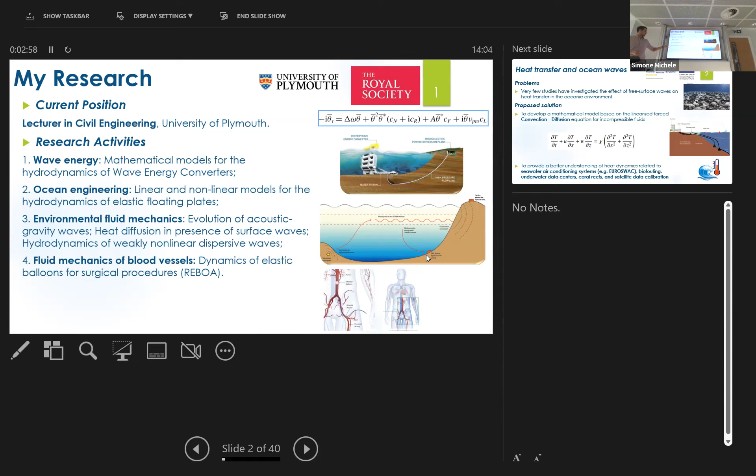More recently, I started working on this problem: heat transfer related with ocean waves. There are really very few studies that focus on the effects of free surface waves on heat transfer in the oceanic environment.

My idea, in order to study this effect from free surface waves, is to develop a model based on this equation here, which is the convection-diffusion equation or transport diffusion equation. This is linearized, so there are no nonlinear terms here. It looks simple, but if U and W, the velocity components, are complicated, the solution can be challenging.

In this case, T is the temperature, small t is time, X and Z are the coordinates. This chi here is the thermometric conductivity, and U and W are respectively the horizontal and vertical velocity components.

Now, the application of this theory can be broad. The aim is to provide a better understanding of heat dynamics related to seawater air conditioning systems. I'm involved in this EuroSWAC project, which is an Interreg project. Here you can see a sketch: basically, there is an intake pipe and outtake pipe to use seawater as a refrigerant to air cooling.

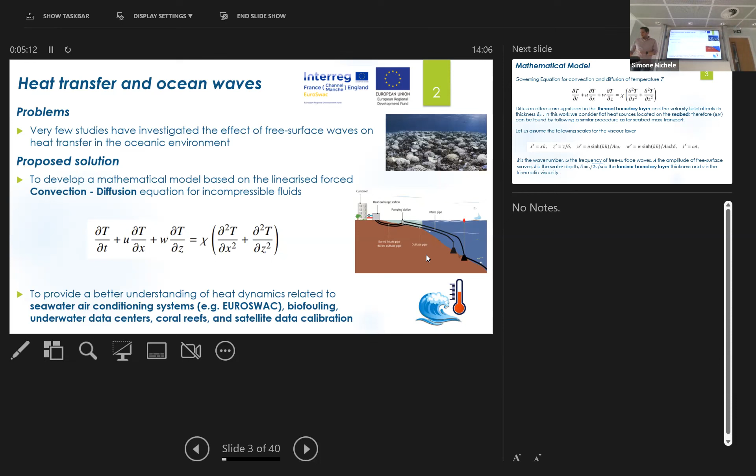So again, this is the governing equation for the temperature T. I'm considering laminar flow, and I consider also flat heat sources located at the seabed for simplicity. That means large gradients of temperature occur in this viscous and thermal boundary layer, which means the velocity field must depend on fluid viscosity.

In water wave theory applied to the viscous boundary layer, we usually assume the following scales. K is the wave number, so it's 2 pi divided by the wavelength. This delta here is the thickness of the boundary layer, defined as the square root of 2 nu divided by omega, where nu is the kinematic viscosity and omega is the frequency of the free surface waves.

A is the amplitude of the free surface waves, and this is the scale for time. Here you can also see the scale for the horizontal and vertical oscillations in the region close to the seabed. These are quite popular scales in the field of viscous boundary layers in the ocean.

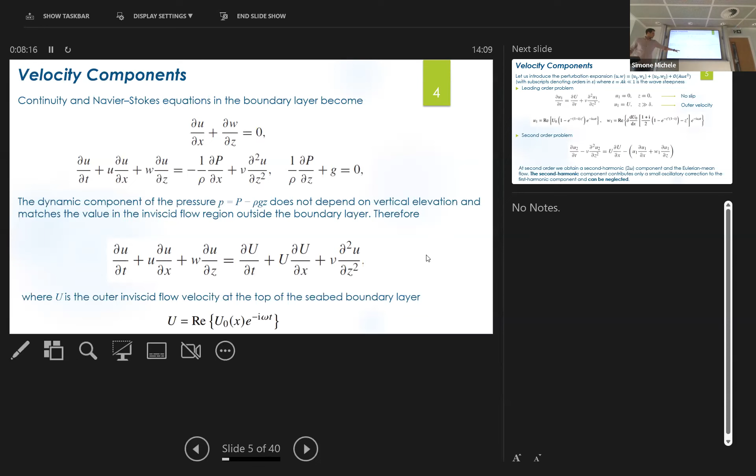And apply a perturbation expansion. This is a standard procedure used to analyze seabed mass transfer phenomena in the ocean. U1 are the leading order velocity components, U2 are the second order components, so here we are developing a second order theory. Epsilon represents the wave steepness.

In this theory, we could— did you assume shallow water? No, we are in the case of intermediate waters, so it's general. We are just assuming that AK is much smaller than 1.

So the wave steepness is smaller than 1. Yeah, the water depth is not in this problem, is it? No, it's general. It was the beginning with KH, right? No, we are not shallow water, it's completely general. These are the scales that we usually have even in intermediate water depths. AW is basically the velocity scale for the water particle velocity on the free surface.

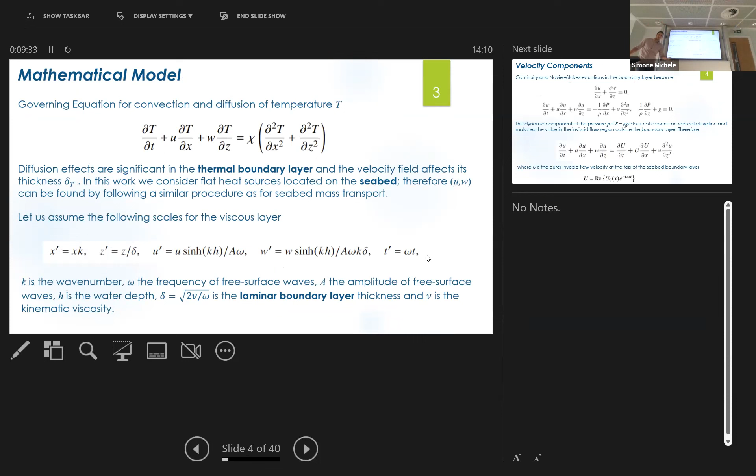The presence of the hyperbolic sine is the effect of water depth, but we are in intermediate waters. It has to be intermediate, right? Otherwise, exactly—if it's deep water, then you don't have any effect.

So we apply this perturbation approach, and we have this first equation here, which is a kind of heat diffusion equation forced by this term, which is the effect of free surface waves at the seabed. Now we apply these two boundary conditions.

We have the velocity equal to 0, so the no-slip condition at the seabed. And we also assume that the velocity in the viscous boundary layer matches the outer velocity, the velocity related to the free surface waves.

This expression can be easily solved, and here you can see the two solutions. Once we get U1 first, the horizontal component, W can be found by applying the continuity equation. And these velocity components

are related to a synchronous response, so they have the same frequency as the incident waves.

Now we can move to second order. This is the first order solution of the velocity field in the viscous boundary layer. For the second order problem, we need to solve this expression here. Now we need to find U2.

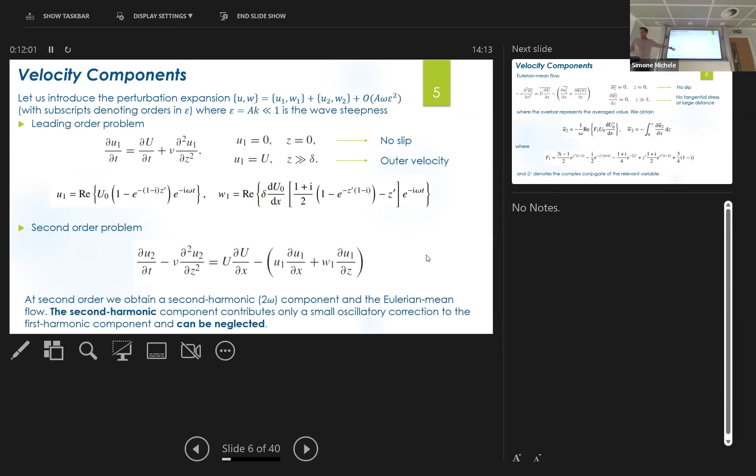We can average this expression and get this differential equation. The boundary conditions that we apply are shown here: we have again the no-slip condition at the seabed, at z equal to 0, and we apply the no tangential stress at very large distances.

We can solve this expression; we just need to integrate with respect to z, and we get the expression for U2, the horizontal component, and the vertical component of the Eulerian mean current. As you can see, that depends on these variables, U0 and the derivative of U0 with respect to x.

Inside these expressions, you can see F1. This function is shown here; it's quite complex, but it represents a combination of oscillation and hyperbolic functions. The asterisk denotes the complex conjugate of the relevant variable.

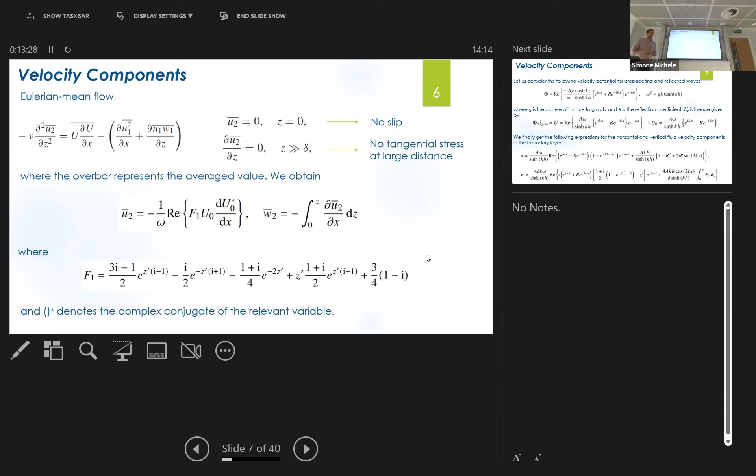Now, basically here, we need to just substitute a suitable expression for the velocity potential. We need to assign this irrotational velocity component. For example, since we are considering a two-dimensional geometry and a flat seabed, we can consider the following velocity potential for free surface waves.

This is the velocity potential for propagating and reflected waves. When r is equal to 0, we have just propagating waves. When r is equal to 1, we have the effects of reflected waves. This is basically the dynamics in front of a breakwater, where we have standing waves.

And k, which is the wave number, can be found by solving this dispersion relation, which relates frequency and wavelength. This is valid in intermediate waters, for any value of k.

Now, we are assigning this velocity potential, so we can now find U0, the velocity in the irrotational domain. This is given here, because the horizontal velocity is simply the derivative with respect to x of the velocity potential.

So the expression for U0 is given here. Now we can substitute this U0 inside the previous expressions for U1 and U2, W1 and W2, and we get these very long expressions for the velocity components. Basically, these velocity components represent the velocity components in the viscous boundary layer at the seabed.

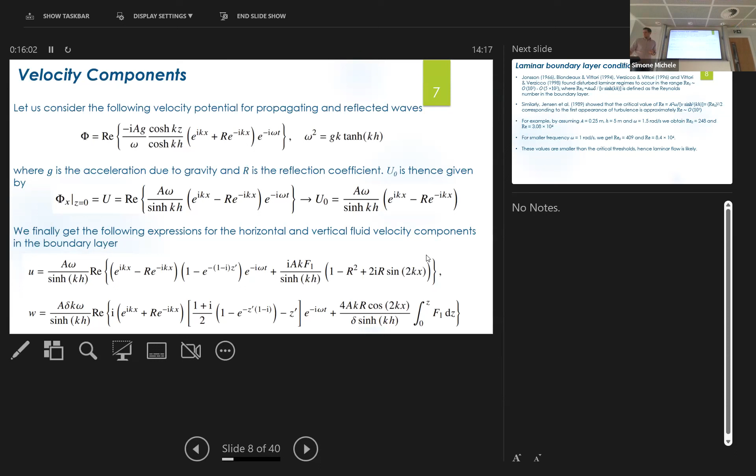Now, some authors analyze the stability of laminar flows at the seabed. For example, Jonsson, Blondeau, Vittori, and Verzicco found that there could be some disturbed laminar regimes in this range of value of RE delta, where RE delta is the Reynolds number in the boundary layer. So when this RE delta is between 100 and 500, we can have some perturbation of the laminar flow.

Similarly, Jensen defined a different Reynolds number, related with RE delta, and found that when RE is equal to 10 to the 6, we can have turbulence.

In other words, if you consider free surface waves having amplitude of about 0.25 meters, propagating over sea depth of 5 meters, and having frequency of 1.5 radians per second, which is a common situation in the ocean, in this case RE delta is 248, and RE is 3 times 10 to the 4. So, for example, in this case, laminar flow is likely to occur.

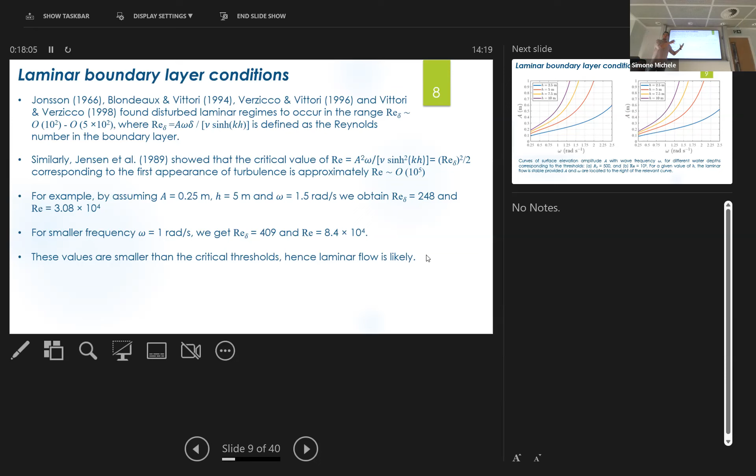In this figure, I show the two criteria: this is the criteria derived by Jonsson, Blondeaux, Verzicco, and others, and this is the criteria derived by Jensen. Here I have the free surface elevation amplitude, A, versus wave frequency for different water depths, corresponding to the different thresholds.

Now, for a given value of water depth H, the laminar flow is stable, provided A and omega are located to the right of the relevant curve. What does it mean? For example, if I consider water depth about 5 meters and wave frequency of 1 radian per second, I have a stable laminar flow only if the wave amplitude is less than 0.28 meters. In other words, I need to pick some values of A and omega located on the right-hand side of the relevant curve.

Above this curve, we can have turbulence.

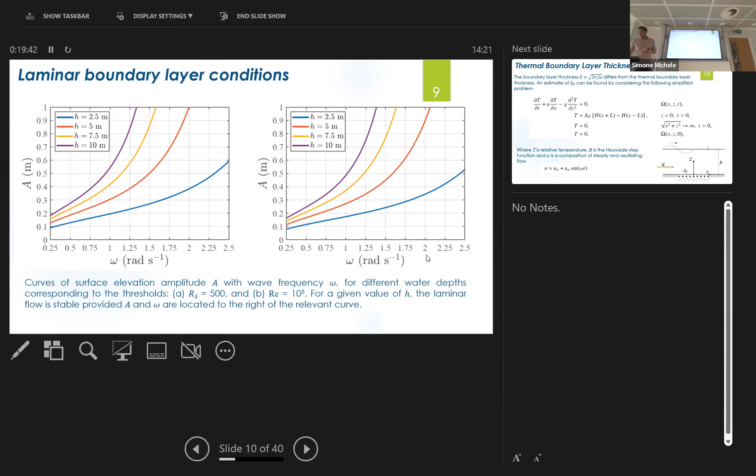Now, we need still to simplify the problem. We need to estimate the boundary layer thickness, the thermal boundary layer thickness. That's because the viscous boundary layer thickness, defined here, the scale for the boundary layer thickness, differs from the thermal boundary layer thickness. It's different. One deals with viscosity, the other deals with temperature.

Now, an estimate of delta T, the thickness for the thermal boundary layer, can be found in this way. For example, we can consider this simplified problem here.

We still have a convection diffusion temperature equation in absence of a vertical velocity component. So we are just considering horizontal flows, trying to simulate the effects of simple propagating waves. U, the velocity here, can be written in this form as a composition of steady and oscillating components, like if we have an Eulerian mean component and an oscillating component.

The diffusion term related with the horizontal diffusion can be neglected, because it's much smaller than this one. It can be shown later, so I'm just reporting the dominant terms here.

At the seabed, I can consider this heat source here. Delta T is the temperature of the heat source, located between x equal to minus L and L. H is the Heaviside step function. Here the temperature is 0, and the temperature is also 0 at very large distances from the heat source.

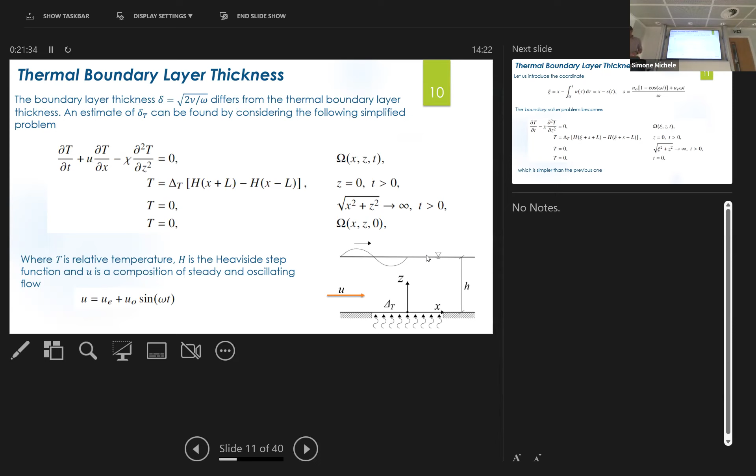If I consider this problem, it can be solved by using the following coordinate. I can integrate the velocity to get this new variable S. If I substitute this quantity in the previous problem, I can simplify the equation.

So I don't have the convective term anymore, but I have a more complicated term at the seabed. Anyway, the problem is much simpler. I can solve it by applying the sine Fourier transform, because I have a Dirichlet boundary condition at the seabed.

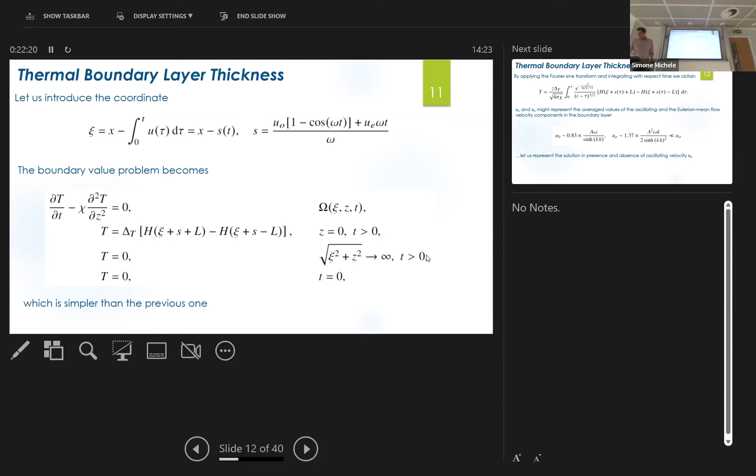Then I can integrate with respect to time. So the solution of this problem is written here. It has been derived by Pedley, I think 50 years ago. This is the solution expressed in integral form for the temperature.

Now U0 and UE, my two velocity components, the steady component and the oscillating component, can also be written in this way. This represents the solution in the absence of oscillating velocity.

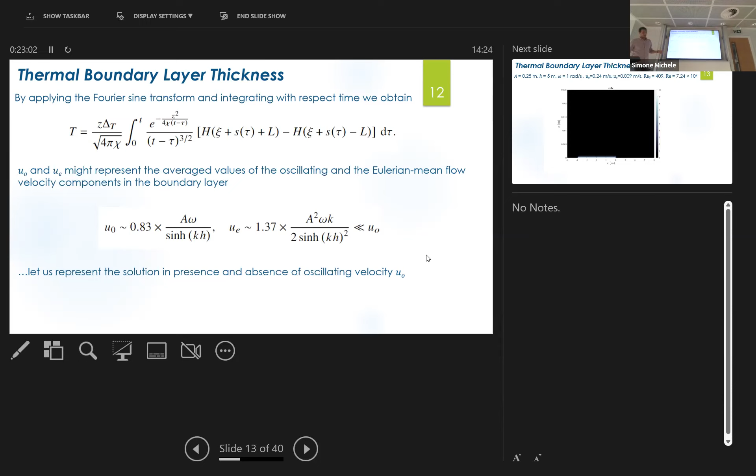Now if I assume these quantities, I can try to represent the propagation of temperature. I consider these parameters: free surface wave amplitude about 0.25 meters, water depth about 5 meters, frequency of 1 radian per second. These are the corresponding velocities.

This is the velocity at the leading order, and this is the velocity of the Eulerian mean flow. As you can see, the Eulerian mean flow component is much smaller than the leading order velocity, but as I will show you later, this is the main actor influencing temperature diffusion. I also have these two Reynolds numbers, and I assume that the laminar flow is stable.

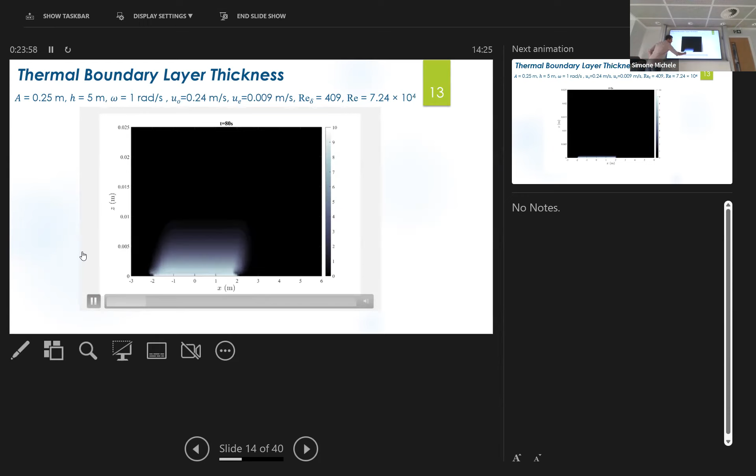So I have this heat source here from -2 to 2 meters. I have the oscillating component and the Eulerian streaming, the Eulerian mean flow, directed rightwards. As you can see, there are fast oscillations, but the temperature field bends towards the right. Here the heat source has a temperature of 10 degrees.

Now, for simplicity, I neglect the effect of the fast oscillations. So what's going to happen? The temperature tends to propagate upwards and then bends towards the right. Here you can see time, 300 seconds, then up to 500.

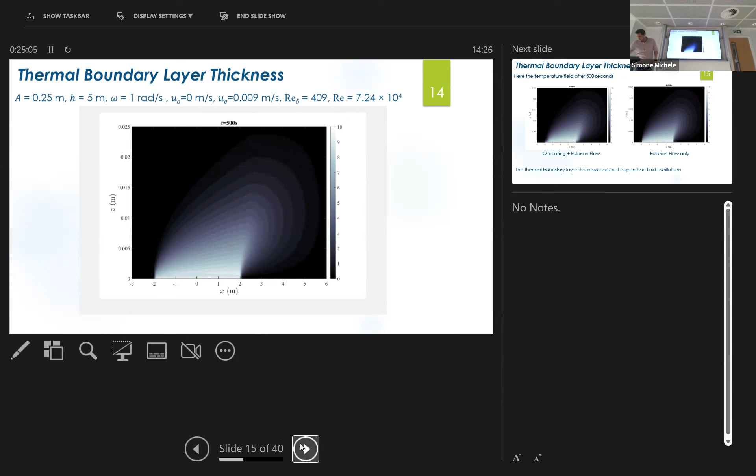Now I compare this picture with the previous one when time equals 500 seconds. As you can see, the thermal boundary layer thickness is not affected by fast fluid oscillations - this thickness here is basically the same as we have here. So that means to estimate the boundary layer thickness, we can simply consider the Eulerian mean flow directed horizontally, for these scales of the heat source, if the heat source is not very, very small.

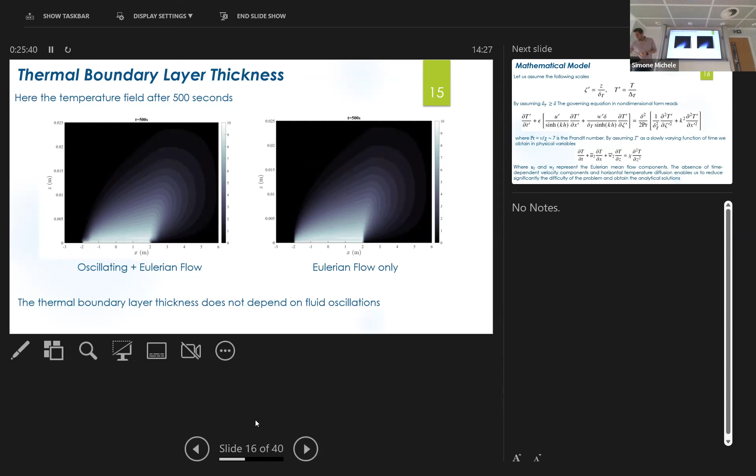Now we can try to simplify the problem for the temperature. We go back to the equation for temperature and assume these two following scales. Delta T is the thickness of the thermal boundary layer - not the viscous boundary layer - and this big Delta T is the relative temperature of the heat source.

I just would like to point out that this theory is valid for very small variation of temperature. Otherwise, viscosity, density, and specific heat would depend on temperature. So in this case, kinematic viscosity, density, and specific heat are constant.

Now I can substitute these quantities into the temperature equation, and I can get the temperature equation expressed in non-dimensional form, which is specified here. Now, the second and third terms on the right-hand side are much smaller than the first.

So that means that the temperature for these scales, for these two scales and the scales that I introduced at the beginning, the temperature does not depend on the fast time oscillations, because this term would be equal to 0. So that means that we can assume T, the temperature, as a slowly varying function of time.

Depends slowly on time. So if I assume this, I can integrate, I can average the equation with respect to the fast time, and I can get this equation here for the temperature.

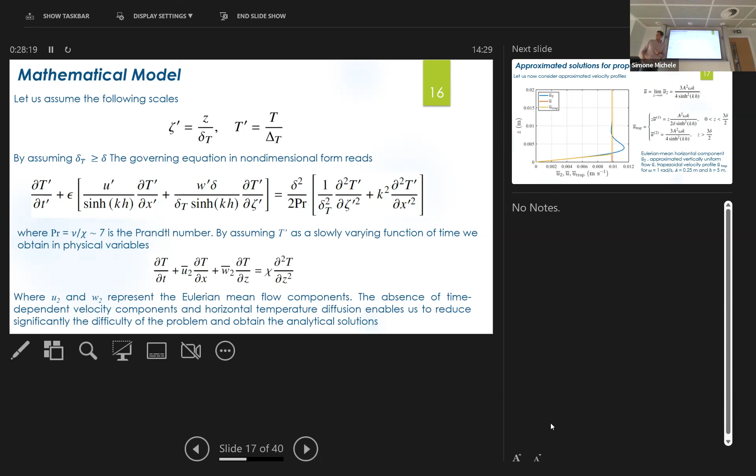Now, let's consider just propagating waves, so the case in which R, the reflection coefficient, is equal to 0.

The blue curve shown here is the Eulerian mean horizontal component, which, as you can see, looks quite complicated. It grows linearly, then it starts to oscillate and reach a constant value.

Well, an analytical solution in presence of this velocity component is quite difficult, so let's try to understand what's going to happen if I consider an approximated velocity. For example, I can consider a constant velocity, which is represented by this red line.

So basically a uniform flow, constant velocity. And then I can consider the trapezoidal approximation, the yellow curve here, in which the velocity increases linearly, and then it reaches a constant value when z is equal to 3 delta divided by 2, where delta is the viscous boundary layer thickness. Here you can see the expression for the trapezoidal velocity component and the expression for the uniform flow.

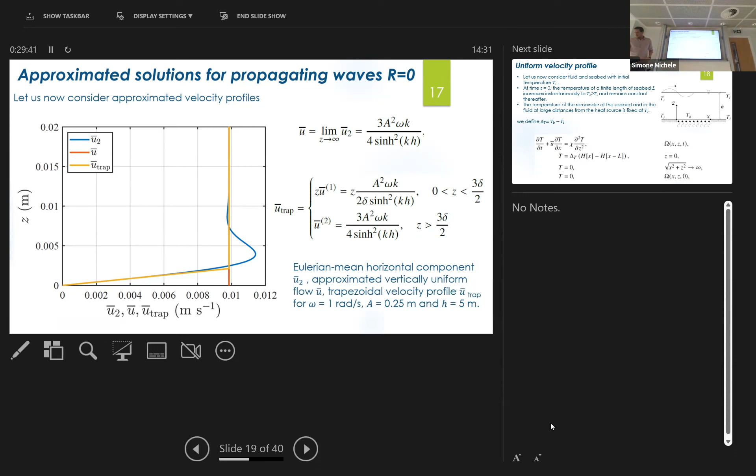Let's study the uniform velocity profile, which is basically similar to the problem that I already showed you, except for the fact that there is no time dependence in the velocity component here. So the solution can be found in the same way.

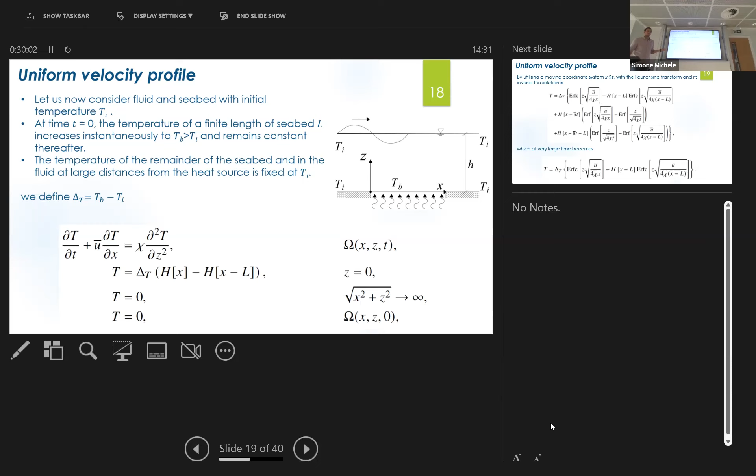And now the integral can be solved explicitly, and the solution is given here. So temperature is a composition of these 4 terms.

The first term here is the steady state solution, it does not depend on time. The second and third terms, on the second and third row, represent the time dependence above and outside the heat source.

When time increases, at very, very large time, this term, the Heaviside function, becomes equal to 0, so this term does not exist anymore. And the solution at very large time, the steady state solution, is given here, in which Erfc is the complementary error function.

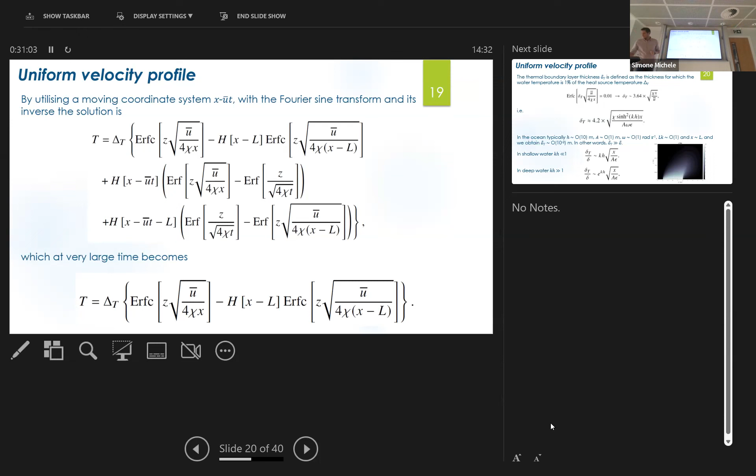Let's try to estimate the thickness for the thermal boundary layer by using this expression here. If I consider just the thermal boundary layer above the heat source, I can define the boundary layer thickness as the thickness for which the temperature is 1% of the heat source temperature delta T.

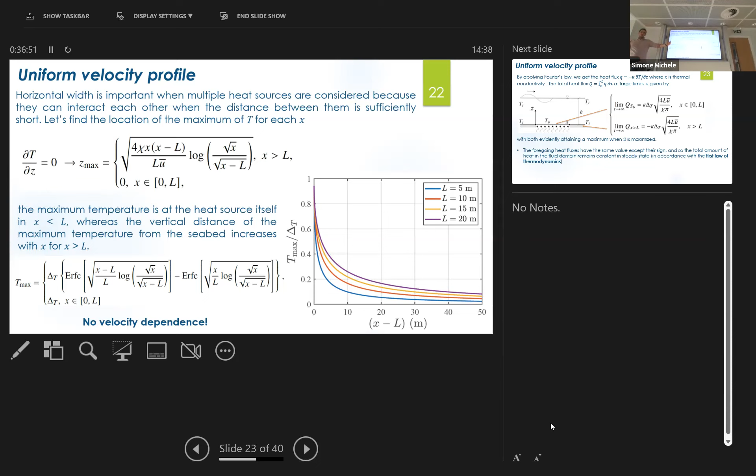But it's interesting to note that this value does not depend on the fluid velocity. I would say the velocity should increase the width of this thermal boundary layer, but apparently this is not the case. So the velocity only affects the vertical dimension of the thermal boundary layer thickness, while the horizontal width depends just on the length of the heat source.

This is also shown here. This is basically the horizontal dimension, approximately, which is the same dimension that we have here. But the vertical width is different. Maybe it's difficult to see here, but the vertical dimension is different, while the horizontal width is the same.

We derived the temperature. Now we can derive the total heat flux by applying Fourier's law, where K is the thermal conductivity. The total heat flux is the integral of Q evaluated in correspondence of the heat source. So this is the total heat flux exchanged between the heat source and the ocean.

So we basically derive the temperature, then integrate, and we can find these two values. QSB is the heat flux exchanged between the heat source and the ocean in correspondence of the heat source. Q for x larger than L is the heat exchanged outside the heat source region.

As you can see here, it's negative, simply because in this case the heat flux is directed towards the seabed. The magnitude is the same, because the heat in the fluid domain remains constant in steady state, a consequence of the first law of thermodynamics. So we have positive heat flux here and negative heat flux here. Here we don't have anything, simply because the temperature bends towards the right.

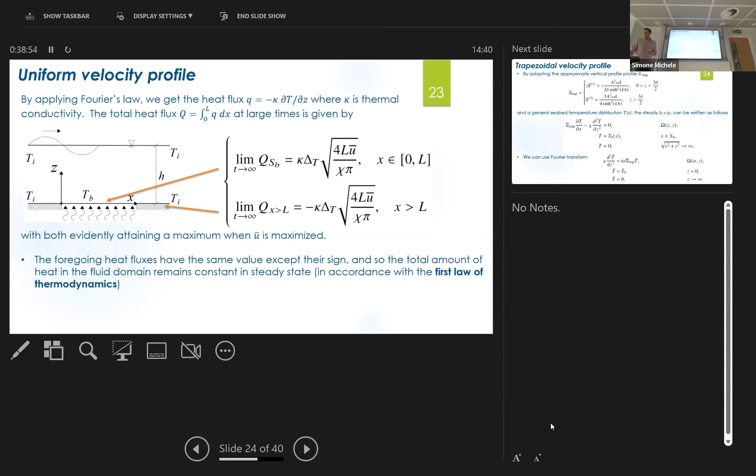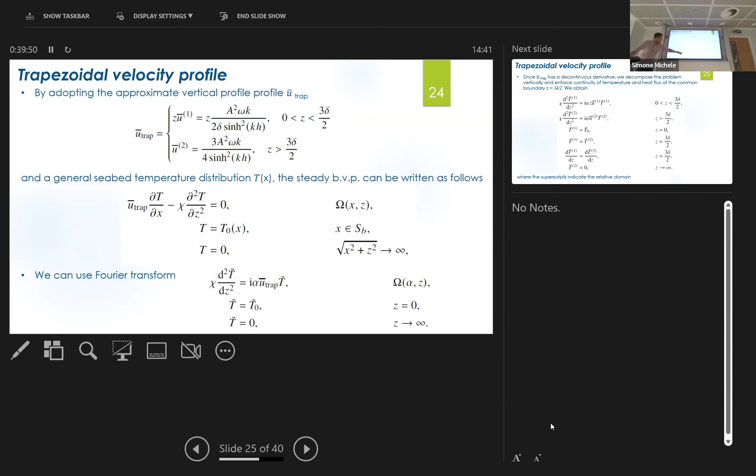Remember that this depends on z in this way: z until 3 delta divided by 2, then it remains constant. So this problem can be solved by matching the temperature and the heat flux at this common boundary, where the velocity profile changes the stiffness.

The number 1 in the parentheses refers to the fluid domain between 0 and this coordinate. The number 2 in the parentheses refers to the fluid domain above 3 delta divided by 2. Now, this problem can be solved.

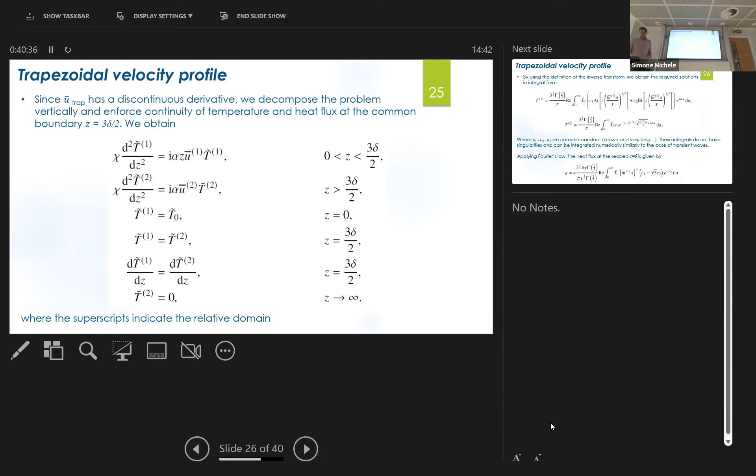The first equation admits a solution expressed in terms of Airy functions, and the second equation can be written as the solution of the second boundary layer problem, in this form here. There are constants C1, C2, and C3 that depend again on the Airy functions. They are known but very long, so they are not reported here for brevity. This is the solution where the velocity grows linearly, and this is the solution where the velocity remains constant.

Ai and Bi are the Airy functions of first and second kind. We can again apply the Fourier law and get the heat flux at the seabed, in correspondence of the heat source, and it can be expressed in this integral form.

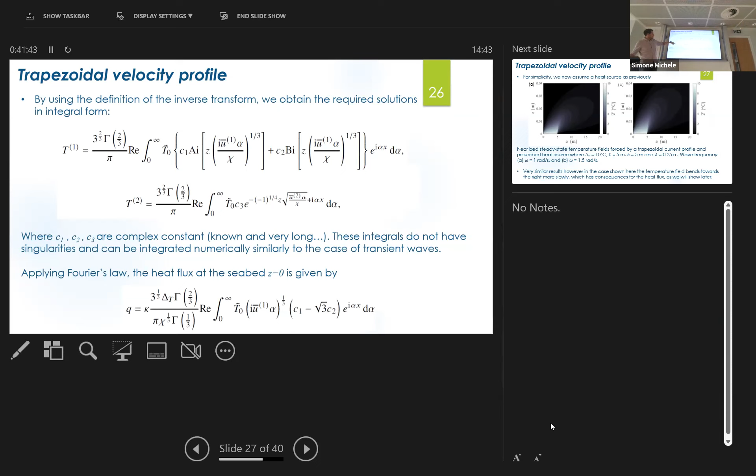For simplicity, I can consider a heat source of 5 meters length, characterized by constant temperature, and try to evaluate these two expressions.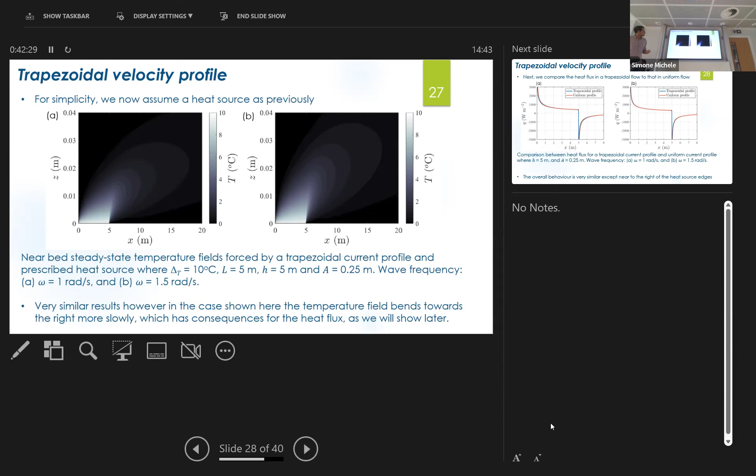The difference can be represented here: this is the heat flux in a trapezoidal flow versus uniform flow. The difference is located here, to the right-hand side of the edges. So maybe it's quite difficult to see, but the uniform profile case tends to exchange more heat than the trapezoidal velocity profile case. This clearly has consequences in total heat flux exchanges, as I will show you later.

Here you can see the heat flux basically goes up to plus infinity, and here to minus infinity, just because there is an instantaneous change of temperature at the seabed.

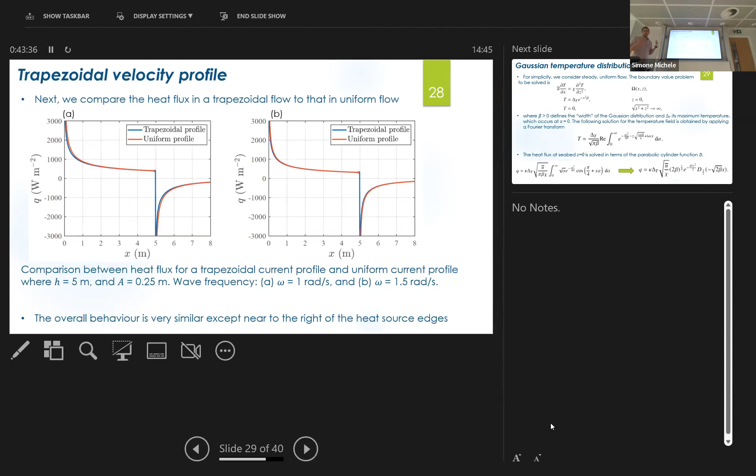Now, we analyzed the case of uniform and trapezoidal velocity profile in presence of heat sources characterized by constant temperature and fixed width. So what's going to happen if the heat source is different? For example, we can consider the case of Gaussian temperature distribution, where the temperature varies according to this expression here.

Again, we can apply the Fourier transform and get the solution expressed in this integral form. And again, for simplicity, I consider the case of uniform flow and the steady state case, so no time dependence.

This expression here allows us to find the heat flux by applying the Fourier transform. This integral can be written in terms of parabolic cylinder functions, D here, so we have an explicit expression for the heat flux at the seabed.

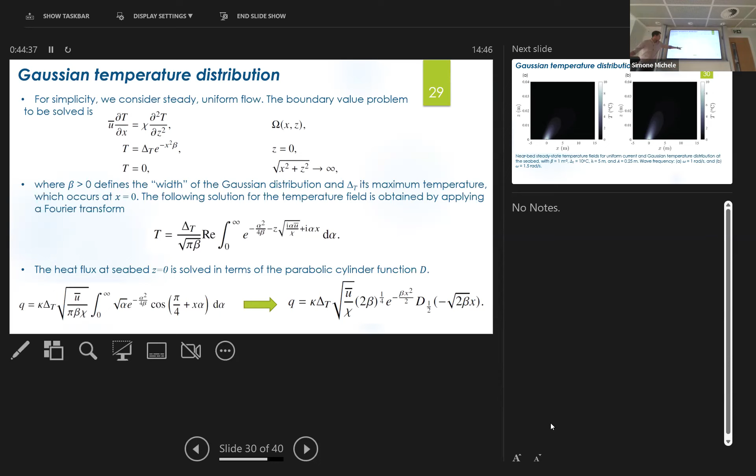Now again, let's try to represent this solution, the temperature, and we get this. We have the same parameters for free surface wave amplitude, wave frequency of 1 radian per second and 1.5 radians per second, and this parameter beta that defines the width of the Gaussian temperature distribution. The maximum of the temperature is equal to 10 degrees. But again, we have the same result: the larger the frequency, the larger the thermal boundary layer thickness.

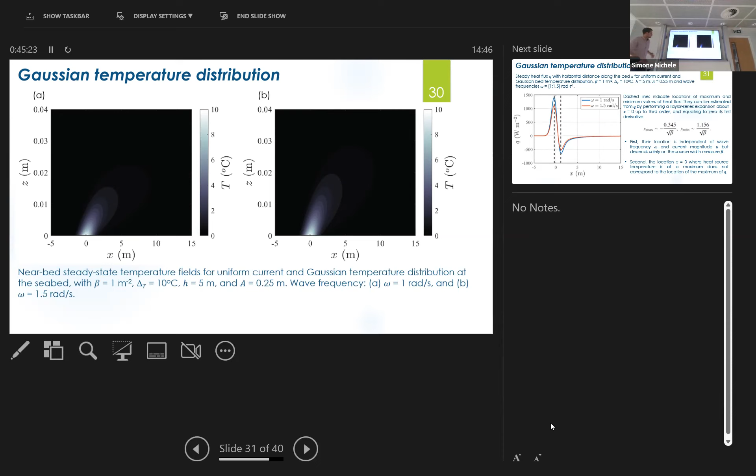We can also represent the heat flux at the seabed, here at z equal to 0, shown here for the two different frequency values. As you can see, there is a maximum and a minimum for the heat flux.

Now, the maximum is not located in correspondence of the maximum of the temperature, because the maximum of the temperature is located at x equal to 0. And there is also a minimum. These values can be found, for example, by trying to find the maximum and minimum value for this expression here.

This is complicated. Since these values are very close to 0, we can try to perform a Taylor series expansion about x equal to 0. That Taylor series expansion gives us these two approximated values for the maximum and minimum values of Q, which are very close to the maximum that we found. So the dashed line corresponds with x max and x minimum, and they are very close to the maximum of the function.

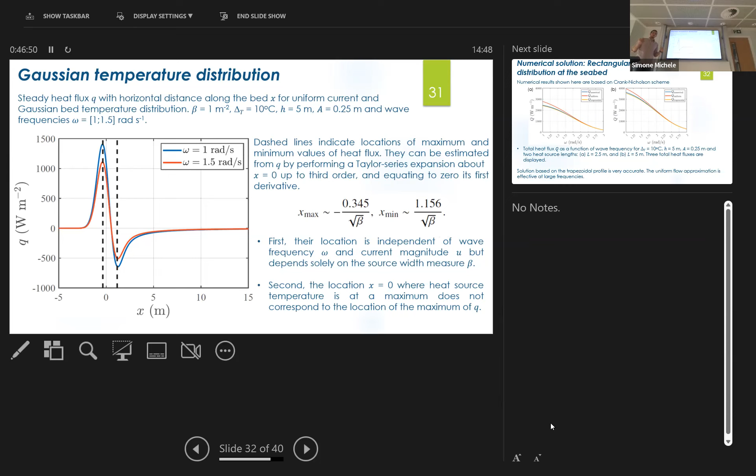Now, the problem of temperature can be easily solved by applying numerical techniques. For example, we can apply a Crank-Nicolson scheme. There are other schemes, but I'm not an expert in numerical methods, so I simply applied a Crank-Nicolson scheme and tried to solve the complete problem, including the complicated spatial dependence of the Eulerian mean flow. I tried to compare the case of uniform and trapezoidal velocity approximations.

Here you can see the values of heat source temperature, sea depth, and so on, for two different values of heat source length. The figure on the left represents the case of L equal to 2.5 meters, and the figure on the right, the length is equal to 5 meters. As you can see, the trapezoidal approximation is very close to the full numerical solution.

On the contrary, the case of uniform flow tends to overestimate the heat exchange rate. That's because at z equal to 0, the velocity should be equal to 0, but the uniform flow does not consider that. Uniform flow considers basically that the velocity is constant throughout the depth. So we can say that the uniform approximation is valid only at very large frequencies, where the velocity of the free surface related to free surface waves is not very large. On the contrary, the trapezoidal approximation is very accurate.

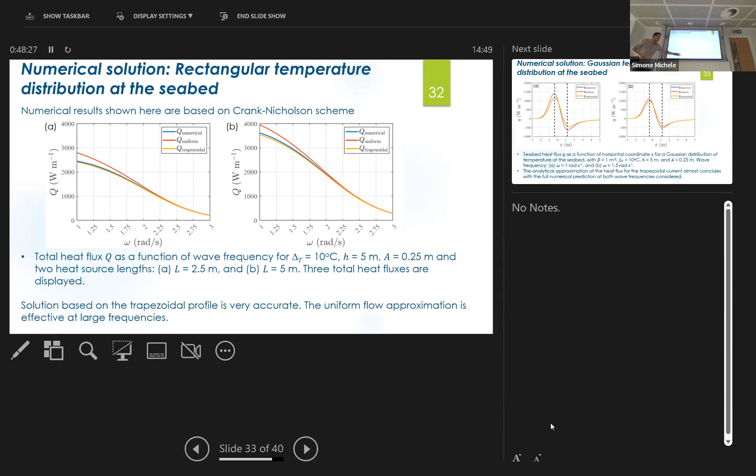This is also shown here. For example, I consider the Gaussian temperature distribution. Again, the uniform flow tends to overestimate the heat flux, Q, and the trapezoidal approximation is very close to the full numerical solution. This is the solution for these quantities, with beta equal to 1 meter to minus 2, and the usual quantities.

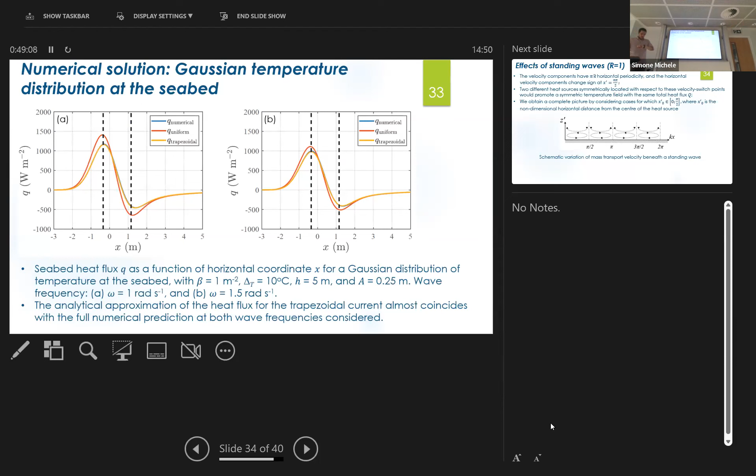We analyzed the case of simple propagating waves. What's going to happen when I consider the case of standing waves, when r is equal to 1? In that case, the velocity field in the viscous boundary layer is more complicated. Here you can see a schematic variation of the mass transport velocity beneath the standing waves. You should imagine that here there is a breakwater. Solution of the temperature equation in presence of these velocity components is very complicated.

So for the moment, I simply solved this case by applying the Crank-Nicolson scheme. Now, the velocity components have this pi divided by k horizontal periodicity. You see there is some repetition here. You should imagine that here there is the node of the standing wave pattern, and here there is the antinode. But pi over 2, pi, and so on, represent some switching points for the horizontal velocity component.

In other words, consider two different heat sources symmetrically located with respect to these velocity switch points. For example, if I consider a heat source located between 0 and pi over 2, and a heat source located between pi over 2 and pi, they will promote a symmetric temperature field, but the same total heat flux. So we can get basically a complete picture by just considering cases in which the center of a heat source is located between 0 and pi over 2.

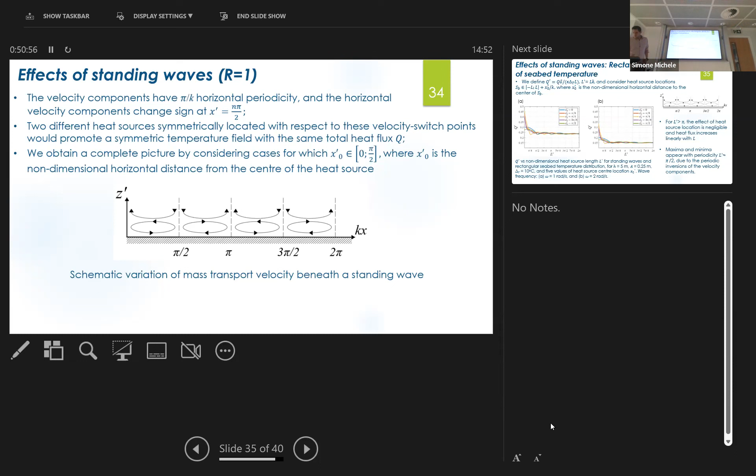Now, we can define this non-dimensional heat flux, and the width of the heat source expressed in non-dimensional form. This is the location of the heat source, and x0 prime is the non-dimensional horizontal distance to the center of SB, where SB denotes the location of the heat source.

So when x0 is equal to 0, we are beneath the antinode. When x0 is equal to pi over 2, we are beneath the node. This is the behavior of heat flux versus heat source length. As you can see, when the length of the heat source is very, very small, much smaller than pi over 2, the location that maximizes the heat flux is x0 prime equal to pi divided by 4. In other words, when the heat source is located between 0 and pi over 2, we have the maximum heat exchanged, and in this region, the horizontal component of the Eulerian mean flow is maximized.

Then when the heat source length increases, there is no effect on the location anymore, because everything is basically averaged.

Also, you can see that maxima and minima appear with periodicity equal to pi over 2, and this is due to the periodic inversion of the velocity components. Okay, so there are some bumps here.

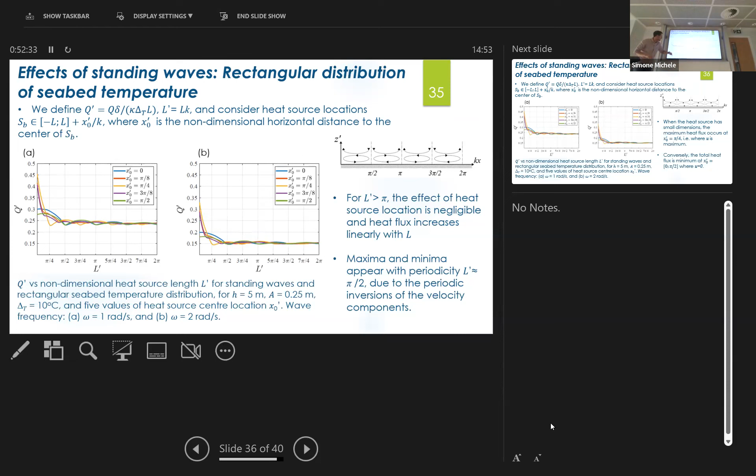Sorry, we need to wrap up in one or two. Yes, this is basically the same slides. So I have just two slides left.

This curve represents the ratio between two different heat fluxes. If I fix the heat source, this is the heat flux exchanged between a heat source as if it was placed in the open ocean in presence of simple propagating waves, and the heat flux if this heat source is located in front of a breakwater. As you can see, the effect of the breakwater is important when the heat source length is very large. When the heat source is very small, it tends to exchange more heat if it is placed in the open ocean. I think this is due to the fact that there are recirculating cells that tend to increase the thickness of the boundary layer, so the total heat flux is smaller.

From this curve, you can also see that a heat source placed in front of a reflecting structure exchanges more heat, provided L is larger than approximately L prime, larger than pi over 4, where L prime is the non-dimensional heat source length.

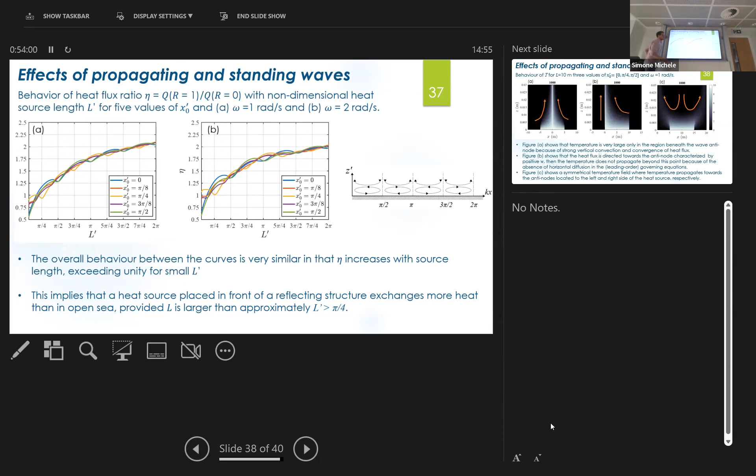This presentation is related to these two works. One is published in JFM, another one is simply accepted, and this has been done in collaboration with Raphael Stuhlmeier and Professor Borthwick from Plymouth and Ton van den Bremer from Oxford and Delft.

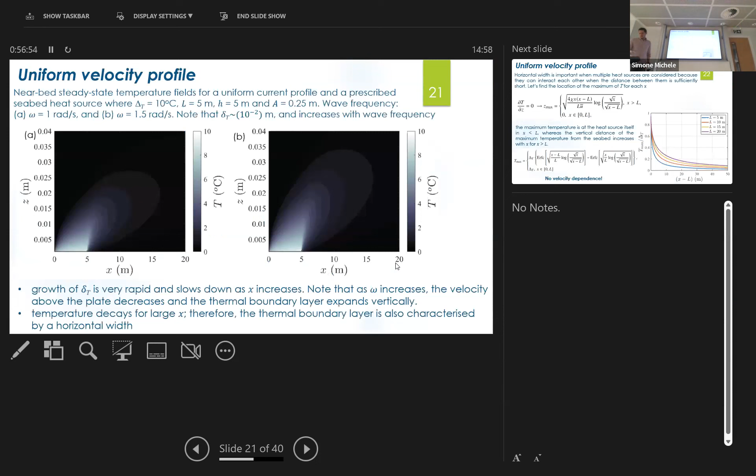Yes, so why is it e to the power kh? No, I mean in shallow water. No, it's in deep water. In deep water, yes, right. So in deep water, I'd assume that it would go to a constant, right? So right now it looks like it's exponentially growing.

Yeah, exactly, it grows a lot because when I go into deep water, basically the velocity tends to be absent, and the increase of the boundary layer thickness goes towards infinity. So that's unrealistic. Yes, so I simply substitute the behavior of the hyperbolic sine when kh is very large, because the behavior of the hyperbolic sine for very large values of kh behaves according to this exponential function. So the theory wouldn't be valid anymore because the thickness would be too large.